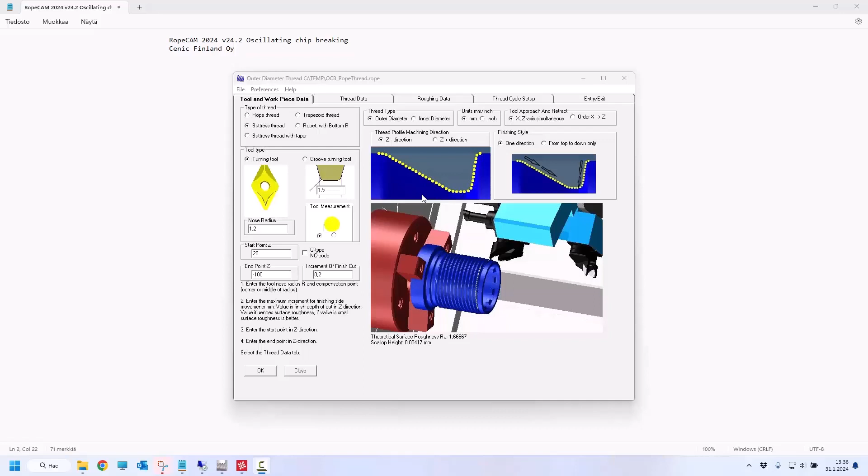Hello everyone, I'm here to introduce the new RopeCAM version 24.2 where they've added an oscillating chip breaker function. And for anyone that doesn't know what RopeCAM is, it's going to use a standard turning tool to do a series of threading canned cycles at different positions to eventually cut out some kind of a thread form. And in this case we're doing a buttress thread, and you can see the dimensions here. Keep in mind it's all metric.

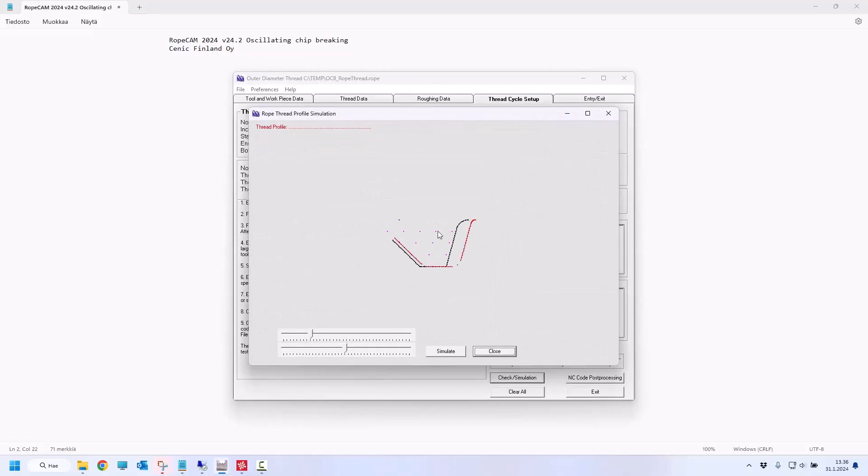Cutting parameters like the depth of cut and the step over. And you'll see in the simulation it'll show each position. So that's what it does on a grand scheme. And the new function they've added just requires a check mark here for the oscillating chip breaker. And that has to be using G33 and X and Z on separate lines. But it does set that automatically. So you can press OK, and you can see that it's changed those values if needed.

And that will activate the chip breaker. This is going to be doing just the roughing so that it's a little clearer to watch. And you can see there just the roughing steps with the step overs and the step downs. And when we post the code, you'll see a batch of canned cycles that are actually going in and out of the work, which you'll see in a simulation in a second, followed by a straight cut. And that is going to break the chip for us.

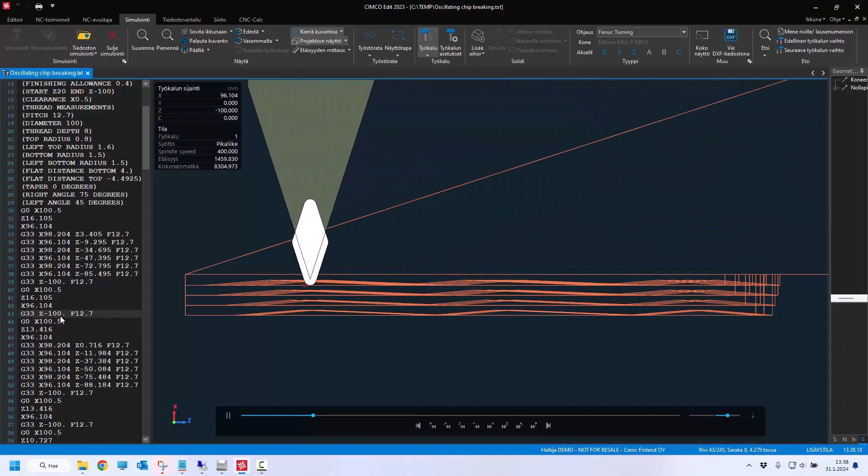So if we look in CIMCO, you'll see that it does just that, where it's going up and down as it does the threading cycle. And that is going to go into the work and out of the work. And each time it exits, that chip will break. Then it's followed by this straight cut, which will also break the chip since the dips are to the root. And so there's valleys there. And when the tool hits the valley, that chip will break.

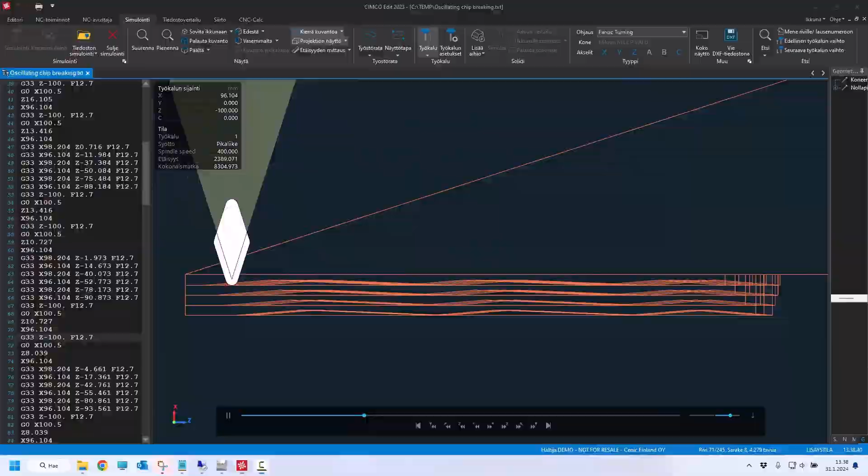So this can be applied to a variety of different preferences, which you'll see in this video. And it just does that and repeats. So we'll take a look next at a tapered thread. And this is a 7-degree taper. Take a look at the roughing and finishing first. And you can see it's on an angle there. Go back to roughing, just again to make it a little easier to see.

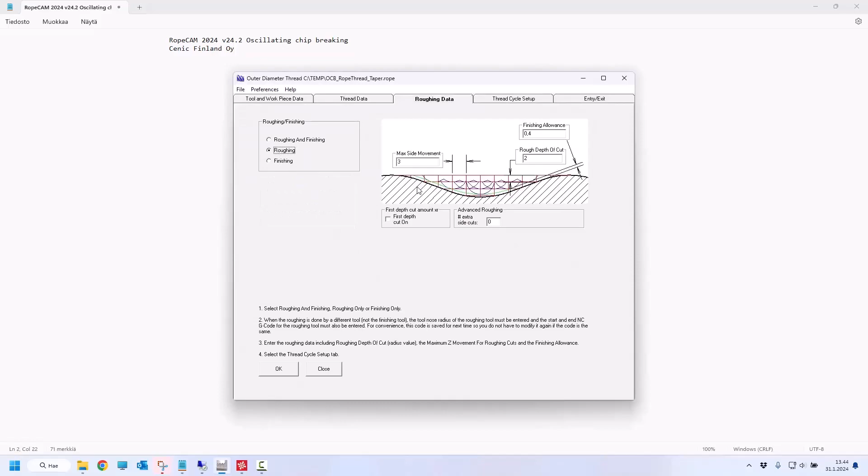And it'll do the same thing. Once again, just entering and exiting and breaking that chip, which is very useful for preventing stringy chips, where you might have to even stop the machine and go in and take the chips out when they wrap around the part. And that means it's also good for things like lights out machining.

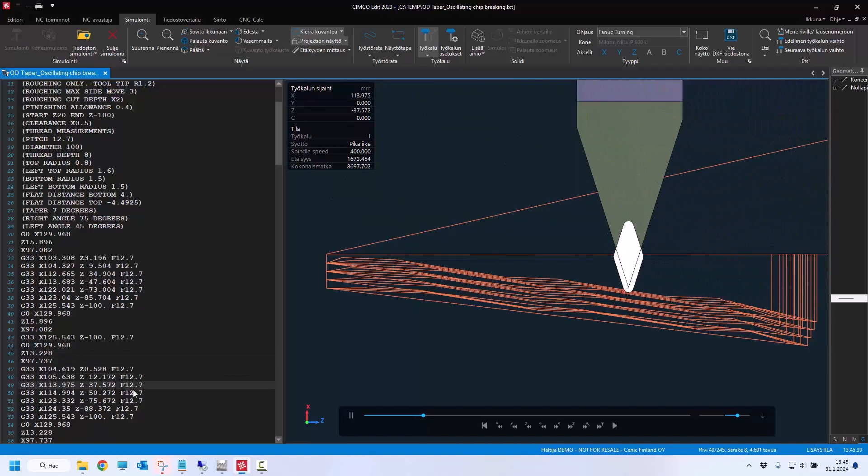And there you can see it doing the same kind of thing on a tapered OD thread. Entering and exiting, and then straight. And just rinse and repeat. Every single pass will have that nature to it. Where if you don't have the oscillating chip breaker on, of course all of the passes are just a straight canned cycle. The usual start to finish style.

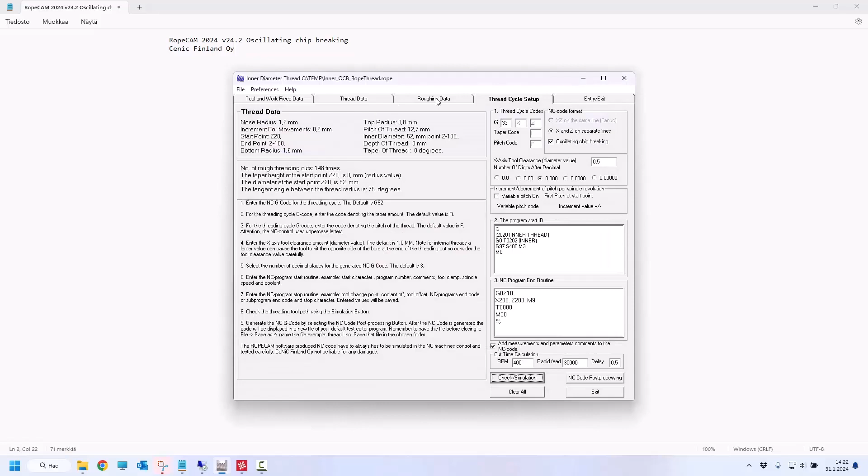And now we'll look at an ID thread, just a straight one. And you can see in the simulation the roughing, it'll do the canned cycles to rough out and leave a certain amount of material. And then you can also have a finishing pass, which we're not looking at in the CIMCO simulation, but that would usually have a finer step over and just finish the profile. And here you can see the chip breaker.

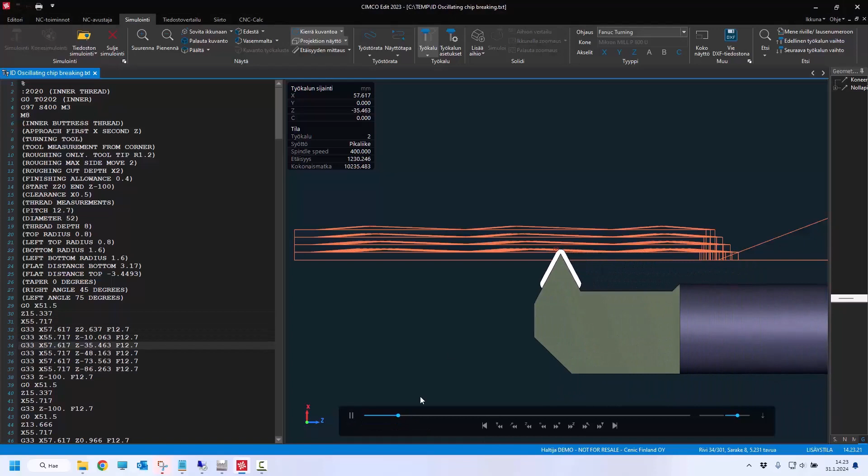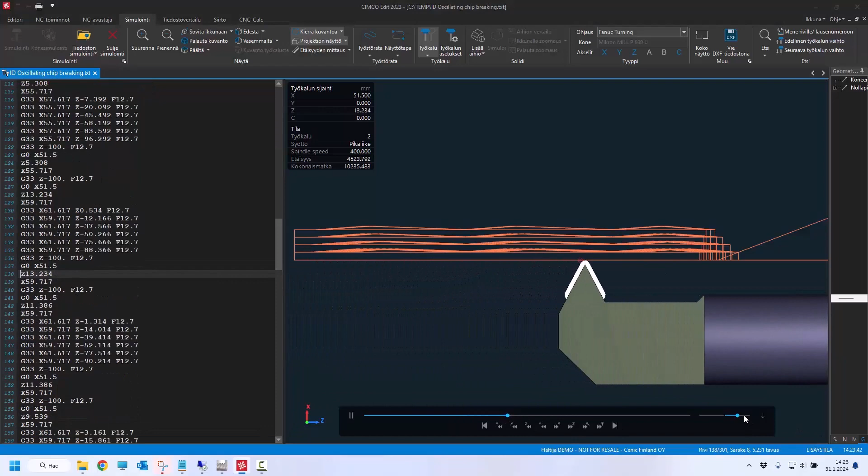And the whole concept of RopeCAM is to use some kind of a threading tool or a turning tool, a grooving tool, but a tool that doesn't have the exact form. It would have to have the right amount of relief that it wouldn't gouge into the thread form, of course. But using this can really cut down on things like vibrations, where you may have a large insert that's the form of the thread. That may work in some situations, but not all. You may also have to pay for some kind of a custom tool.

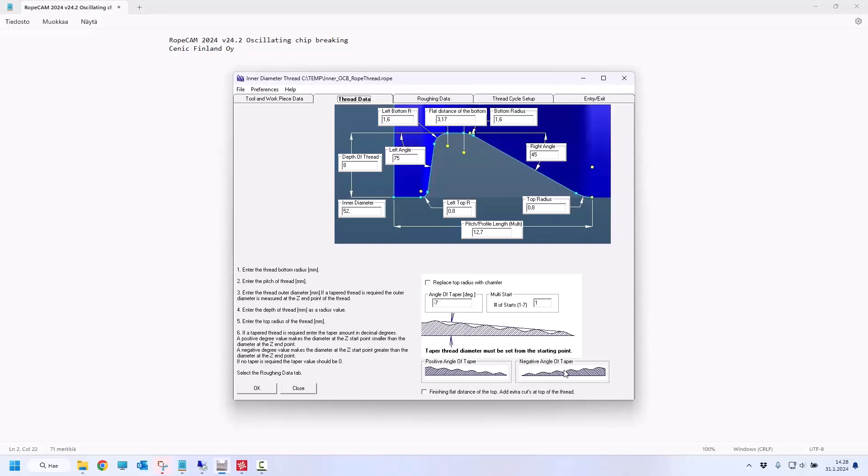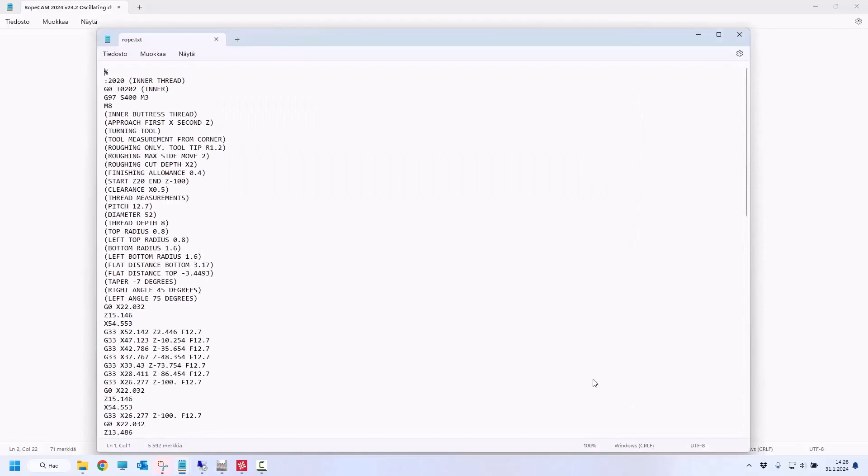So the last example is going to be an ID thread again, but with a taper. You can imagine that you don't have to have an exact form, and there are different threads available in RopeCAM. So there's rope threads, the buttress, and some others. So if you get some kind of a weird thread, as long as you just have a standard turning tool, you can give it the tip radius, and away you go. So here it is, in and out one pass, and straight on the next to cut the remainder. Each one breaking those chips.